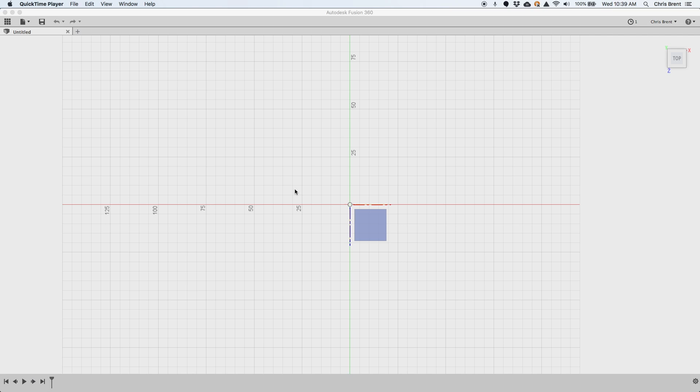Hi everyone. So I was recently at a Maker Faire and a few people asked me how they would go about designing a part and 3D printing it. So I thought I would do a really quick tutorial. Lately I've been looking for a new wallet, and I thought what better thing to do than print one.

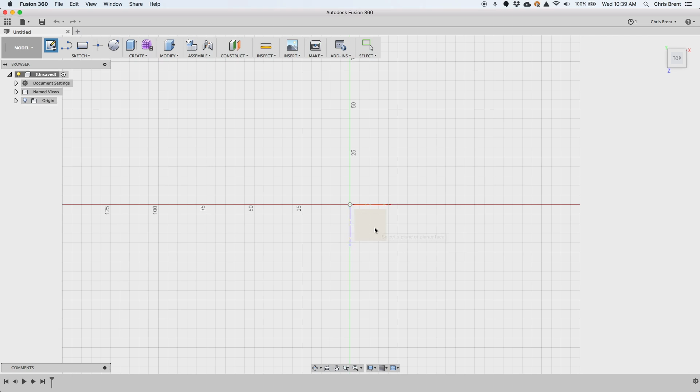So here we go. We're going to use Fusion 360 for this, along with Simplify 3D and Octoprint to actually connect to the printer. So in Fusion, we're going to create a new sketch, pick a plane. I always tend to pick the top plane. Basically, we're going to do a two-part flat plate with a few little whiz-bang designs on it and print those out on the printer.

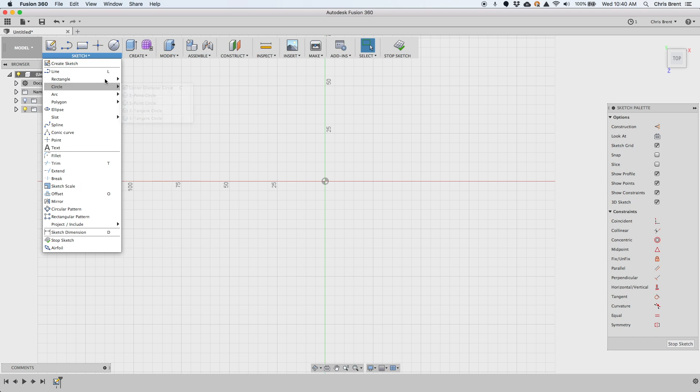So we're basically going to make a rectangle. I particularly like the center rectangle for this particular part. Let's make one. We need to make it about the size of a credit card, because that's basically what a wallet is these days.

So I draw my center point rectangle, I do some dimensions, don't actually care what they are for now, just do D for dimension, enter something, D for dimension, pick the side, and just have some figure in there.

Now I measured some credit cards earlier, and I know that I want them to be about 60 millimeters and about 88 millimeters. Now, I use millimeters.

I live in the US, but I use millimeters. Isn't that confusing? Sometimes it's not. I also do stuff in inches, but when I'm doing stuff for myself, I almost always use millimeters. You can do this in inches, it doesn't really matter. You just have to convert it. Handy conversion factor.

25.4 millimeters equals 1 inch. You'll see some of that later on. Okay, so we've got a basic shape of a credit card.

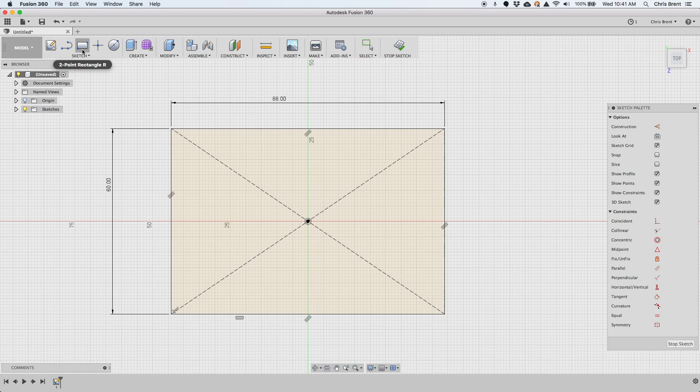Now, my idea is to have two plates with some little recessed sections and glue some elastic in there to make a kind of expandable wallet. So we'll also need to do another rectangle, and I'm just going to put that anywhere for the time being and show you some constraints that we're going to do.

So let's draw this again and escape to get out of that. D for dimension. Need a dimension on that side. Doesn't matter what it is for now. And then a dimension on that side. Doesn't matter what that is for now.

Now, these are going to go here, here, and here. And then have little pieces of elastic coming out of each of them and glue to the top. That'll make more sense later. So let's dimension that. Now, oh, we already did that.

Elastic tends to come in standard sizes, and one of the standard sizes is 1 inch. And a quick quiz, 1 inch equals 25.4 millimeters. So we want that to be 25.4 millimeters wide. And let's make it, say, 6 millimeters high for now. That'll do.

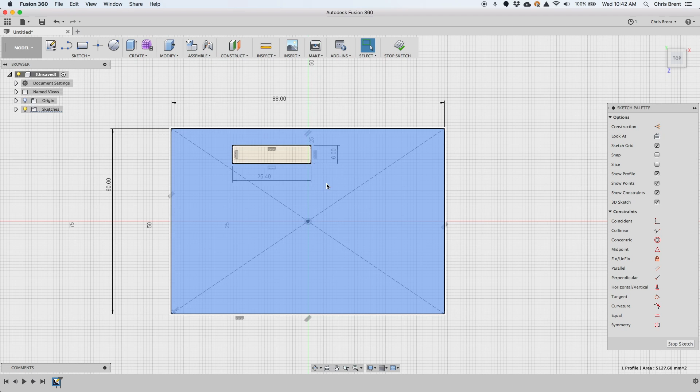Okay, so now this is in the wrong place, so we need to move it. I like to do this by adding points, and there's a few different ways to do it, but we go and add a point, and then Fusion gives us these handy points. So that's the midpoint of that one, and then another midpoint of that one. The little triangle means it's a midpoint.

Now I can go over here and say, make these coincident. So I want this point and this point to be in the same place. So let's move that to there. It's gone black because this is now fully constrained. So if I try and drag this and move it, it'll say, nope, I know it's 6 millimeters high and 25.4 millimeters wide, and I know that these 2 points are always going to be coincident, in other words, joined together. So that's great, I can't accidentally drag anything.

Let's do R for rectangle again. We're going to do another one over here. And then D for dimension, ding, like that.

We could make these parameters, but in this case I'm just going to say, I'm going to pick that, d3, and this one is going to be the same as this dimension. So this is saying this is a function, it's getting the dimension from here, and this one's a function that's getting the dimension from here.

Let me put my points on here again. Point. Coincident points. This point is coincident to this.

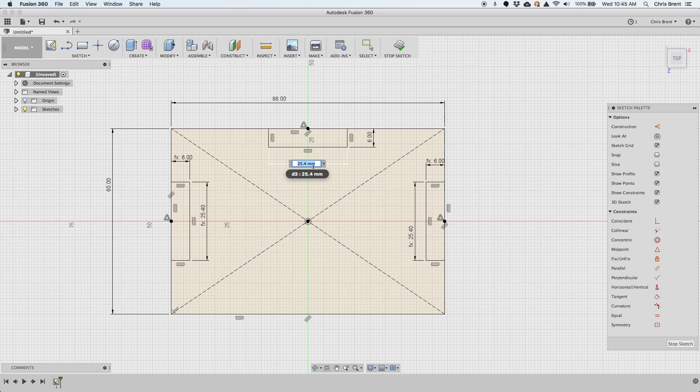And then so that they are coincident. Okay, so we've got our points there. If I decided that I wanted to use 2-inch webbing, 2-inch elastic instead, I could make this 50.8 millimeters, and all of these would change.

Ding, ding, ding, ding. Okay, that's kind of the introduction to parametric model design. You can make better parameters than that, but we'll leave it at that for now. So we make that 25.4 wide. Okay, so we've got the basic structure going on here.

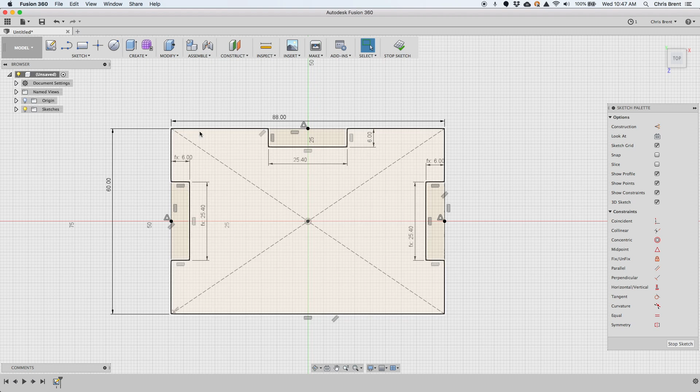Now all our cards are going to get put in through this side of the wallet, and so it's nice to have some way to push them out. A lot of these wallets have a little thumb hole just over here. So let's add one of those.

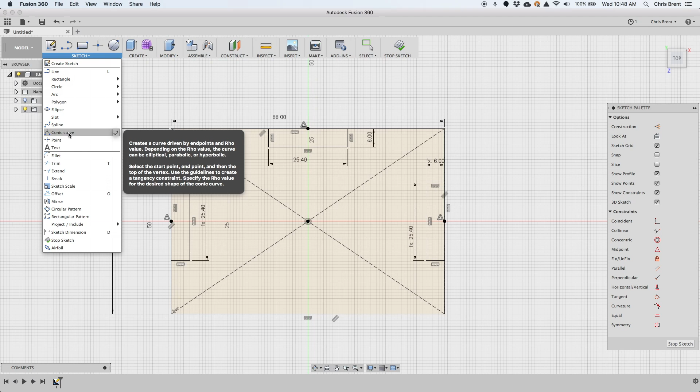Now we could just add a circle, but I think what would be nice is to add one of these conic curves. And I don't remember how they work. So one handy thing in Fusion is that if you just hover your mouse like that, you can see what the command does. So what we want to know is select the start point, the end point, and then the top of the vertex. Use the guidelines to create a tangency constraint. Specify the Rho value. Okay, so what we want to do is do a start point, an end point,

and then I'm going to try and make sure that this is concentric to that. And then this is our Rho value. We want it to be kind of like that.

Okay, let's just add a dimension in here and make sure that that's, say, 5 millimeters away, and then let's add a dimension in here and say that that should be, I measured my thumb earlier, it's about 25 millimeters.

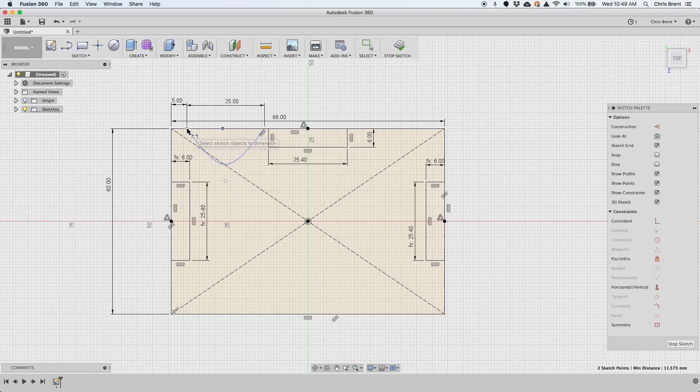Now, I guess what we could do is make this in the center by doing a point here, doing a dimension between here and here. Right, and we could say that that is that divided by 2. So we know that's in the center.

Do a line from here. This is probably, people are going to be shouting at the screen right now. Because you want that to be 90 degrees. So we've drawn a line.

If you ever want to draw a line and pick it, press X, you get a construction line. And now we want to say that this point is coincident to that line. There we go, and that should make that symmetrical. Seems like a fairly convoluted way of doing that, but okay.

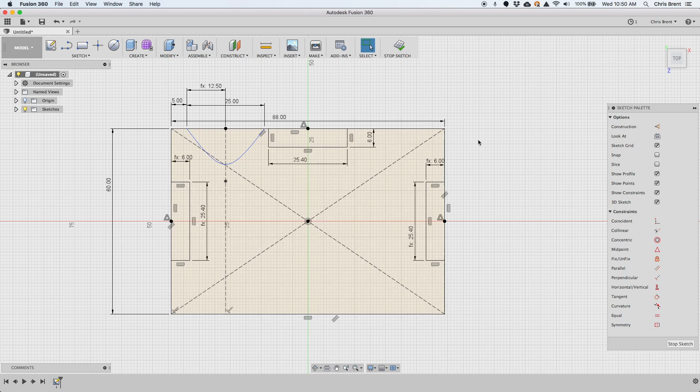Alright, so now we have a basic shape for our plate. We can say stop sketch. We get to start doing some fun stuff. E for extrude. And let's grab this and say make it 3 millimeters. And now we look here, we've got a 3 millimeter plate extruded.

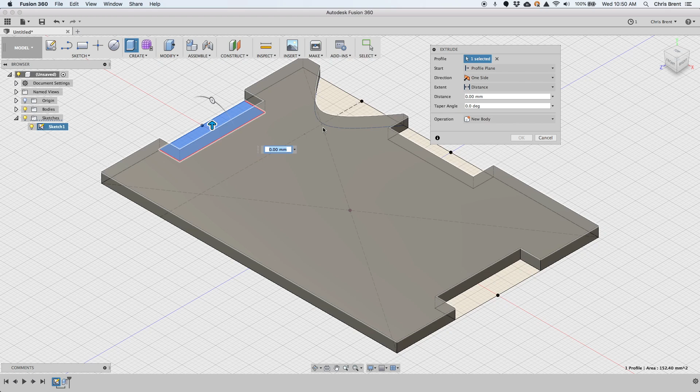Fusion turns off the sketches when we do that, but we also want to make sure that we extrude these little tabs. So we pick these, and we just make those, say, 2 millimeters. Okay, look at it from the top. So we've got some recessed tabs here. We've got a slot cut out over here for our thumb.

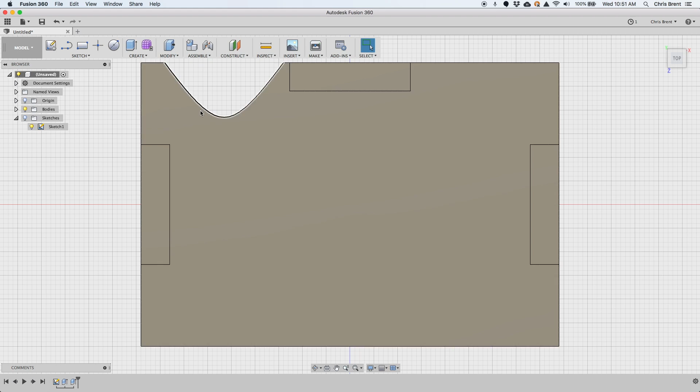And we could just print that like that, but we had some very sharp, nasty edges on there that wouldn't look very nice. So let's do F for fillet. Go back into our little home view here. Pick these 1, 2, 3,

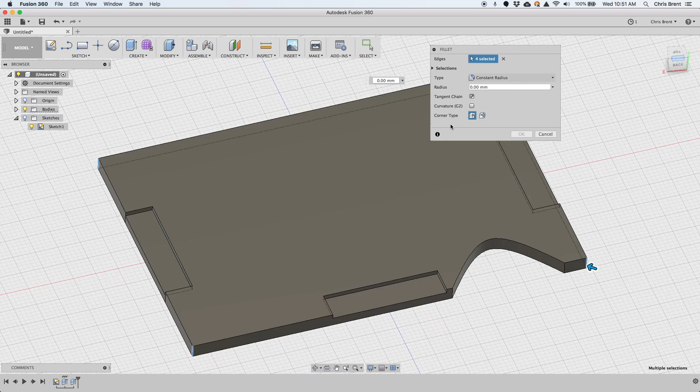4 corners. I like to do this by looking at it from the top. There's no real number that you want to use here. You just want to make this look round. But I do like to pick a number that's kind of even, right? So 3.5 millimeters for that. So that looks better.

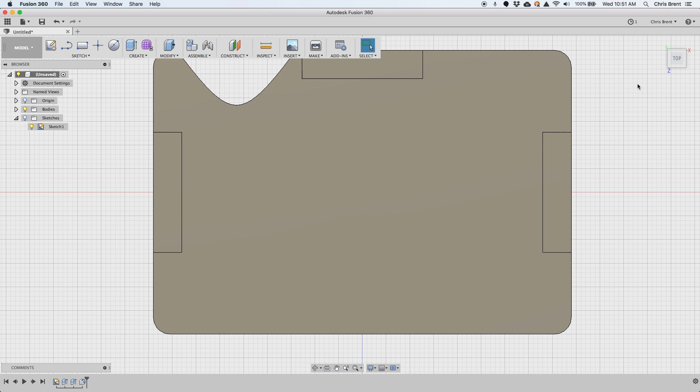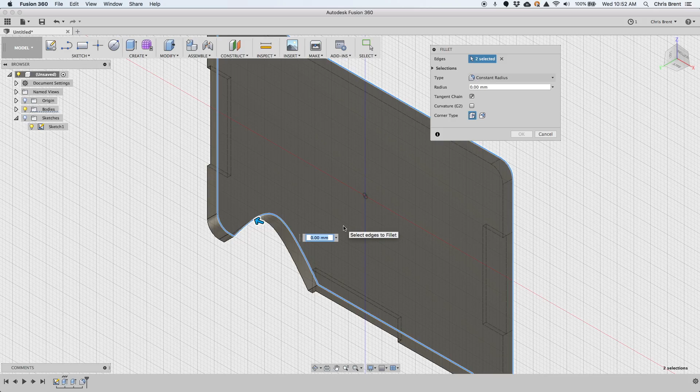But let's make it even nicer and say this face is going to be the inside of the wallet. So if I hold Shift on a Mac, I use 2 fingers, I can scroll around. So this is the bottom side of the wallet. You can also use the little thing here. And if we do F for fillet again, we can pick this and this, these 2 sides, and we can roll this over. So we grab the arrow, and we just probably want to do maybe 1 millimeter.

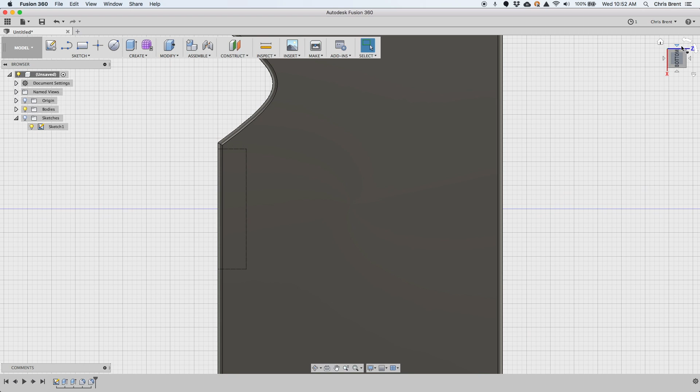Okay, looks good. Now, we want to do some fancy thing on the bottom, right? That would be a wallet. You could print the 2 sides, join them together. Make it our own though.

So at this point I'm going to do a sketch, create a new sketch, pick this face, and I particularly like rockets. So let's draw a rocket. I'm going to find that easier to do if I do it this way around. What I'm going to do first is project.

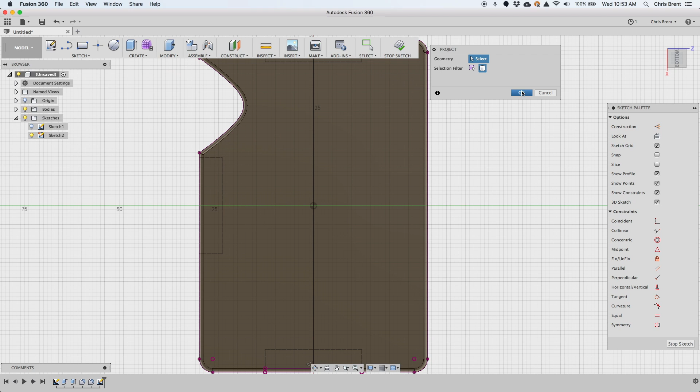I'm going to pick that body. And I'm going to say, okay. And I'm going to turn the bodies off. All right, so that just brought the outline in for me. And then I'm going to do a line.

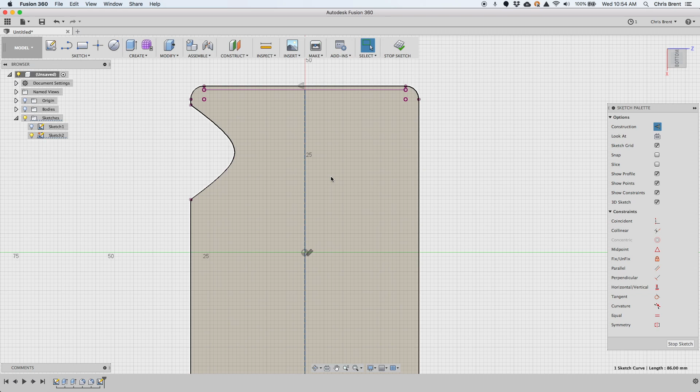Put a center line in here. Escape. Pick the line. Say X again. And then we're going to draw some stuff and do a little bit of mirroring at the end.

Okay, so let's do maybe an ellipse. And again, we can go ellipse and say, select the center point of the ellipse, set the second point to define the first axis, and the third point to define the point on the ellipse. So there's the center.

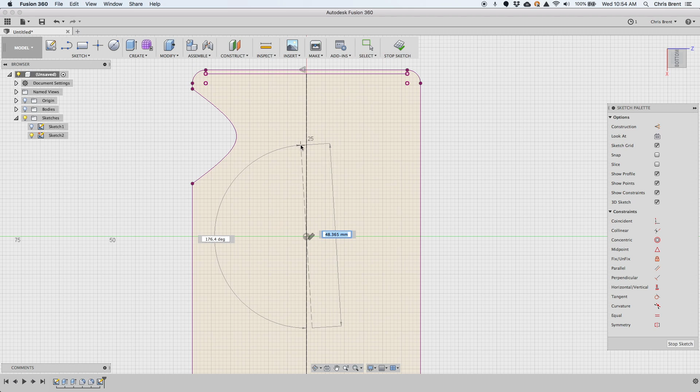There's the axis, and then let's make that. So that's going to be the body of our rocket.

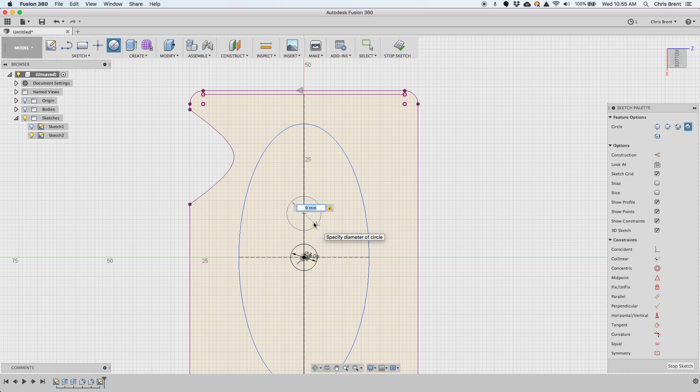Nice. And then what do we need on a rocket? We need some windows. So let's make that one 7 millimeters, C for circle, and just put these along the center line. Make that one 9 millimeters. C for circle, put this on the center line, and we'll make this one 11 millimeters.

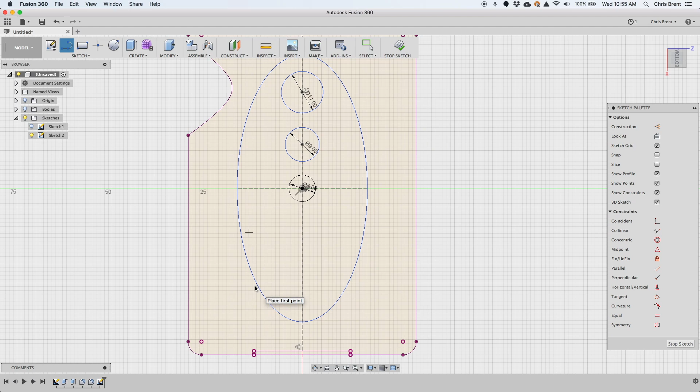Okay, and then what else does a rocket need? L for line, we're going to do a little point on the top, like that. And then a line, we're going to cut the bottom off so it looks more like it has something sticking out. So do the line and then T for trim.

And you pull these out. It's giving me some warnings because I've removed some constraints, but that's okay, don't worry about that. And then let's do a 3-point arc.

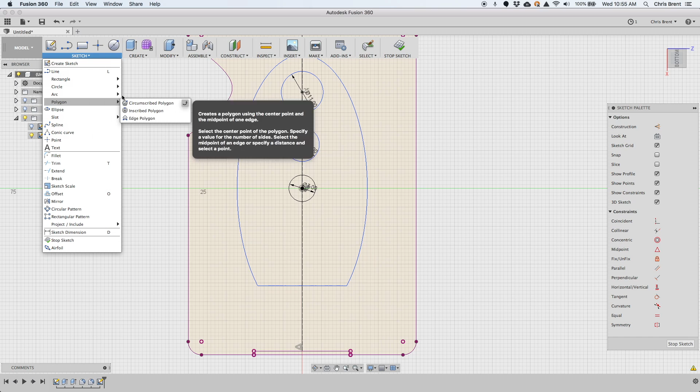Select a start point, an end point, and then a point on the arc. So we're going to do a start point, an end point, and a point on the arc. All right, and we'll do that again.

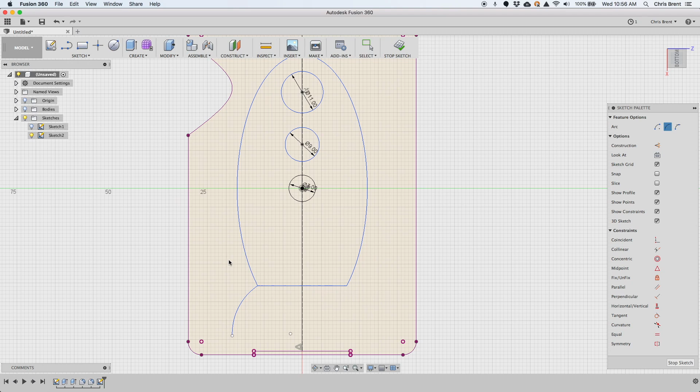The other way we can do this is to 2-finger click on a Mac, repeat 3-point arc: the start point, the end point, point on the arc, and then maybe just some little line across here. So that's a pretty good looking rocket.

You'll notice this is not black because it's not constrained. That's okay, I don't really mind in this case, not really necessary. Okay, we're going to mirror some of these parts.

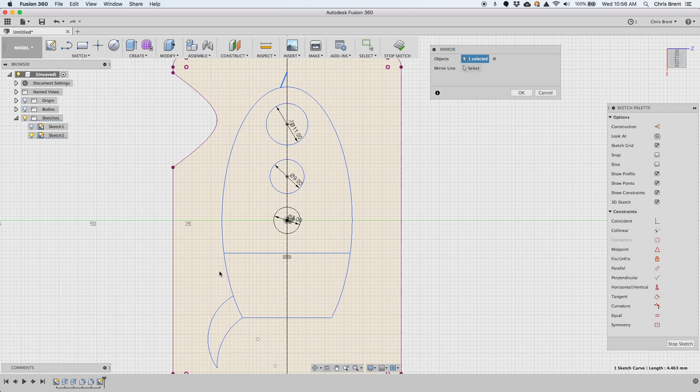Let's take this part, and this part, and pick a mirror line, which is going to be our construction line that we put in earlier. And there we go, we got a rocket.

Now, what we want to do is basically cut this into our body, and then we're going to use a technique that I learned recently to fill it and make it stand out. So to do that, we need some little kind of channel.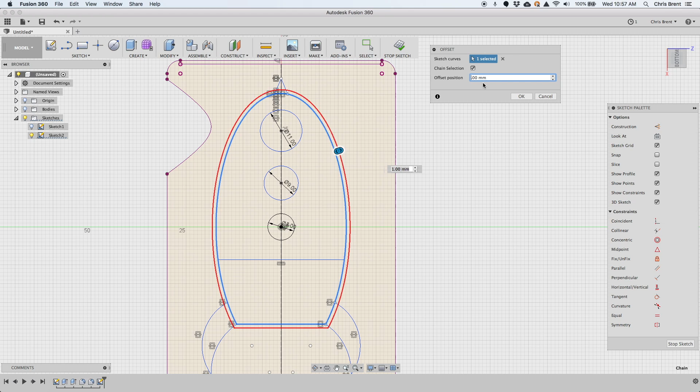To do that, we use the offset command. So O, offset. We'll take this, and we just want to offset that minus 0.5 millimeter. Okay, and then we want to take...

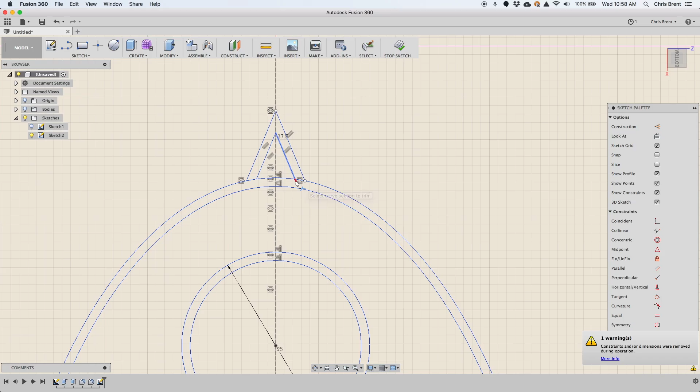Now, when we've done that, it just extends all these lines. So we do T for trim, because we don't want these little pieces that stick out there. Okay, more probably. Zoom out, zoom back in here, see there. T for trim, get rid of that.

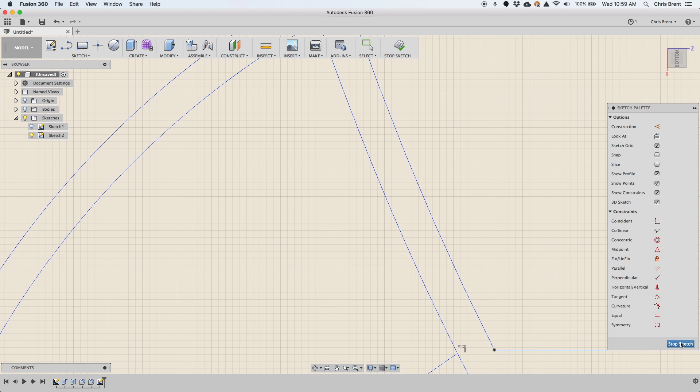Ooh, I hit E for extrude by mistake. Sketch, extend. We need this little line here to extend all the way through. Okay, some of you are probably watching and thinking, why didn't you do the offset and then do the mirror? And we could have done that.

It would have been quicker. Okay, sketch, extend, there we go. Stop sketch. Let's turn all of this back on, or turn the bodies back on at least, and turn the sketches back on.

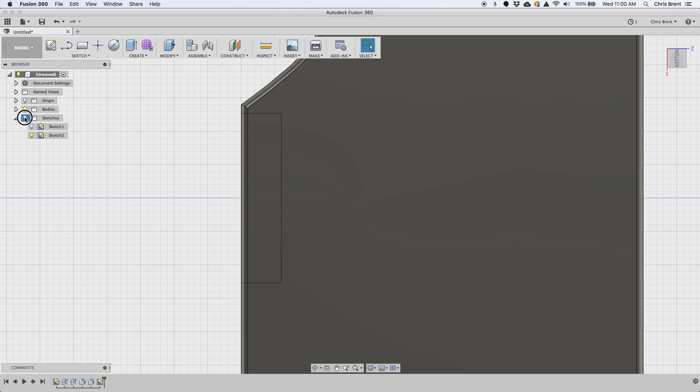Zoom out a little. Now, this sketch has been drawn on top of this body, as you can see here.

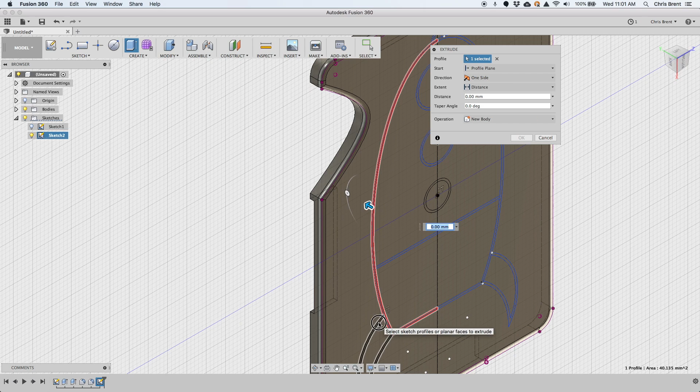So what we're going to do is E for extrude. I'm going to pick all of these inside faces, all of these little lines, like that, and that one, and not that one, that one. If you pick the wrong one, just click it again. Unselected, 6 selected. Unfortunately, because I put that line up, there's a line in there that got projected.

Very end, okay, and then we just need a little piece at the top here. One more. I think that's everything.

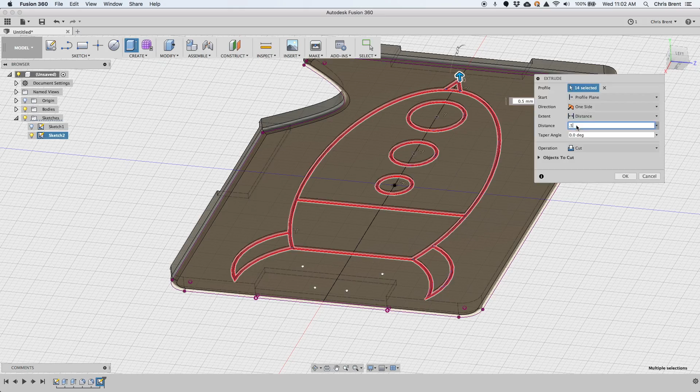Okay, so what we want to do here is do a cut. I'm going to go that way, and we want to cut by 0.5 millimeter. Now, turn the sketches off. You should see that we've just cut a little groove all the way around here.

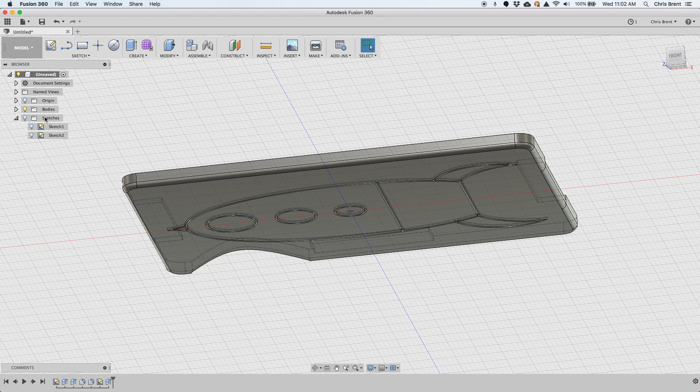Okay, great, looks good to me. Okay, let's take our body, save it as an STL. Medium refinement is fine, binary is fine. Let's call that...

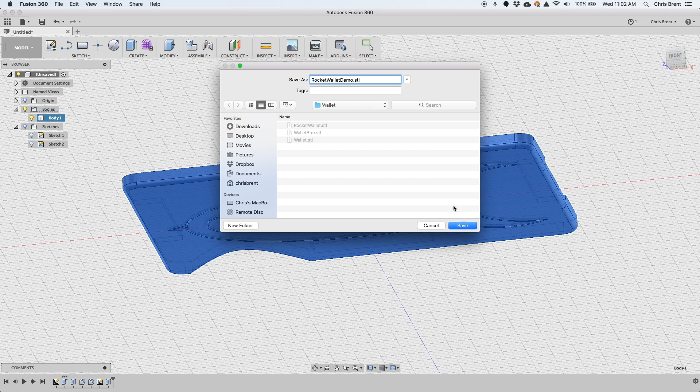Rocket wallet demo, and save that.

Jump over to Simplify 3D. I've already got this set up, that's a whole video in itself. We'll pick rocket wallet demo. The most useful command I found in Simplify 3D: Command L, pick that surface, and it puts that down.

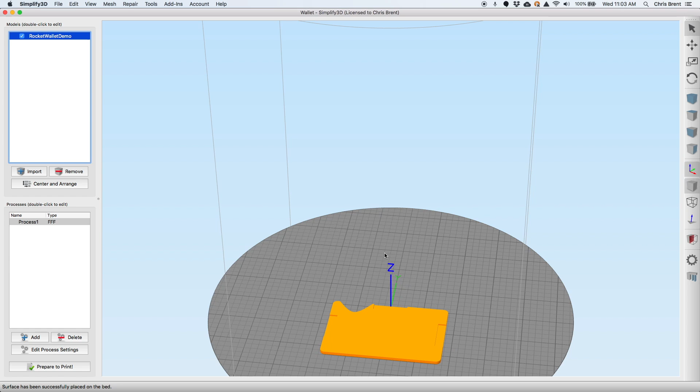Now we want the rocket to be on the bottom, because these little tabs in here, these little slots, we're going to need to be sticking out. We need 2 of these to make a wallet.

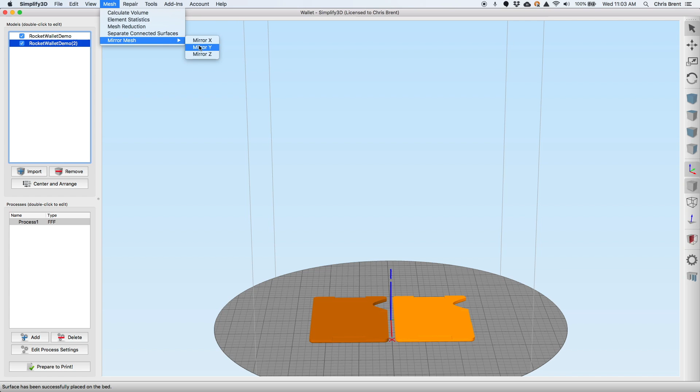D for duplicate, 1 copy, center and arrange, pick just one of them, and then in the mesh we want to mirror it. Now I always get this the wrong way around, I think I want to mirror it in the Y. Yep. To me it looks like I should be mirroring in X, but anyway. So that way we have 2 halves that we're going to stick together.

I know I've already got my process settings set up. It's just the type of filament, how thick the width is going to be, stuff like that.

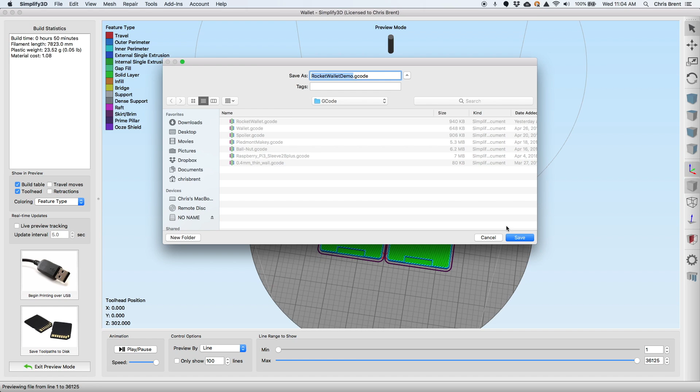Save these toolpaths to disk, and a file, I'm putting it in a folder that I have called G-code. I save that. I come over here, say upload rocket wallet demo, and now we start to print.